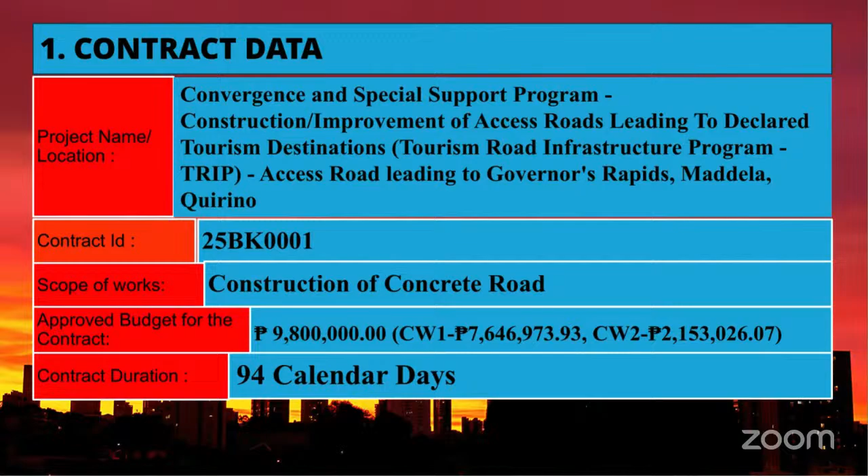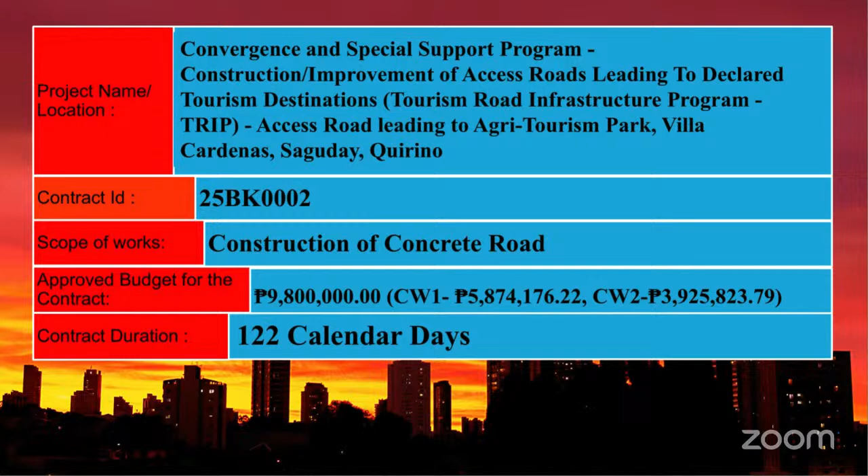For the second project: Convergence and Special Support Program, construction improvement of access roads leading to declared tourism destinations, access road leading to Agri-Tourism Park, Villa Cardenas, Saguday, Quirino. Contract ID 25BK0002. Scope of works: construction of concrete road. Approved budget for the contract: 9.8 million pesos. Contract duration: 122 calendar days.

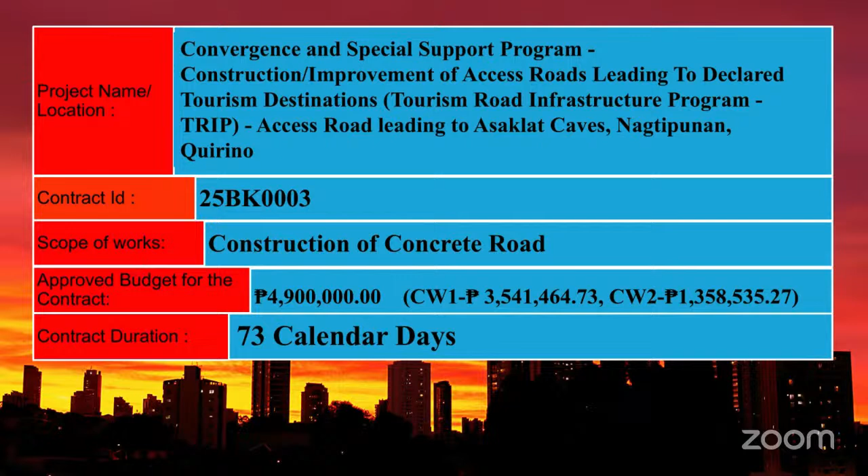For the third project: Convergence and Special Support Program, construction improvement of access roads leading to declared tourism destinations, access roads leading to Asaklat Caves, Nagtipunan, Quirino, with Contract ID 25BK0003. Scope of works: construction of concrete road. Approved budget for the contract: 4.9 million pesos. Contract duration: 73 calendar days.

For the eligibility requirements of the projects, for the Class A documents under legal: a Certificate of PhilGEPS registration must be a Platinum membership per GPPB Resolution Number 15, Series of 2021. Note that based on Section 8.5.2 of the revised IRR of RA 9184, all bidders shall upload and maintain in PhilGEPS their current and updated file of Class A eligibility documents under Sections 23.1(a) and 24.1(a) of the same IRR.

For the purpose of updating the Certificate of Registration and Membership, all Class A eligibility documents mentioned in the section supporting the veracity, authenticity, and validity of the certificate shall remain current and updated. Failure by prospective bidders to update their certificate with current and updated Class A eligibility documents shall result in the automatic suspension of the validity of its certificate until such time that all expired Class A eligibility documents have been updated.

Special PCAB license in case of JV with size range of at least Small B for roads and bridges, and license category of at least C and D for general engineering.

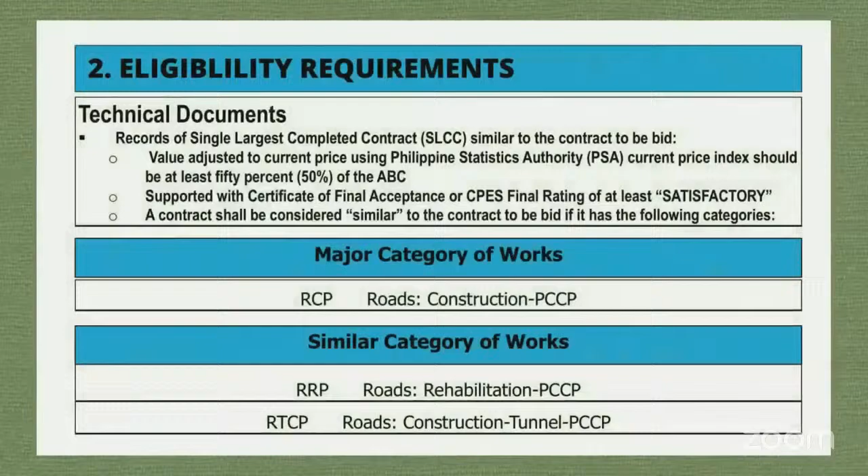Also required: a record of all its ongoing government and private contracts, including awarded but not yet started, if any, whether similar or not similar in nature and complexity to the contract to be bid. Also, records of the single largest completed contract, or SLCC, similar to the contract to be bid. The value, adjusted to current price using the PSA current price index, should be at least 50% of the ABC. It must also be supported with the Certificate of Final Acceptance or CPES final rating of at least satisfactory.

A contract shall be considered similar to the contract to be bid if it falls under the following categories: for the major category of works, RCP - Roads Construction PCCP; for the similar category of works, RRP - Roads Rehabilitation PCCP, and RTCP - Roads Construction Tunnel PCCP.

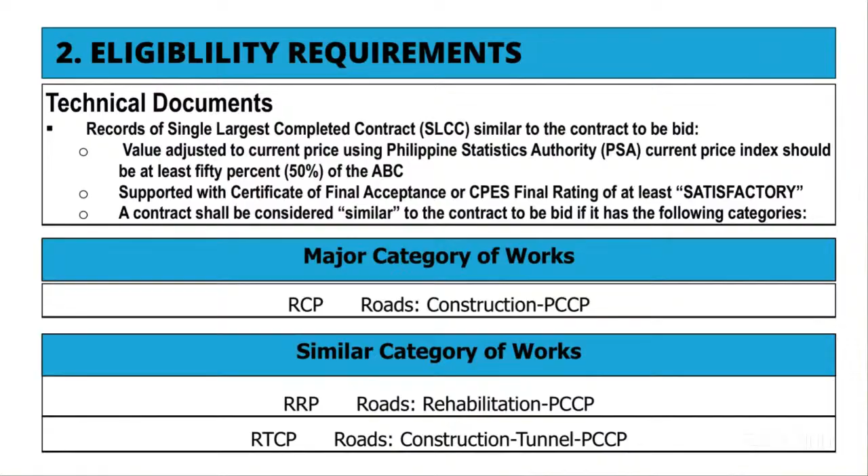For the financial documents, the computation of NFCC must be at least equal to the ABC, computed using the prescribed formula. NFCC equals current assets minus current liabilities, multiplied by a factor K of 15, less the value of unfinished projects, including awarded projects not yet started, coinciding with the contract to be bid.

For the Class B documents, for JV: a valid joint venture agreement. Each partner of the joint venture shall submit their respective PhilGEPS certificate of registration in accordance with Section 8.5.2 of the IRR of RA 9184. The submission of technical and financial eligibility documents by any of the joint venture partners constitutes compliance, provided that the partner responsible for submitting the NFCC shall likewise submit the statement of all its ongoing contracts and audited financial statements.

Regarding the submission and receipt of bids: bid submission may be done manually or electronically. However, bidders should only select one mode of submission, either manual or electronic.

Similar to manual submission, the guidelines for the preparation and submission of an electronic bid are contained in the bidding documents, ITB Clause 17, and Department Order Number 87, Series of 2020. All electronic bids must be sent to the email address electronicbids_Quirino@dpwh.gov.ph.

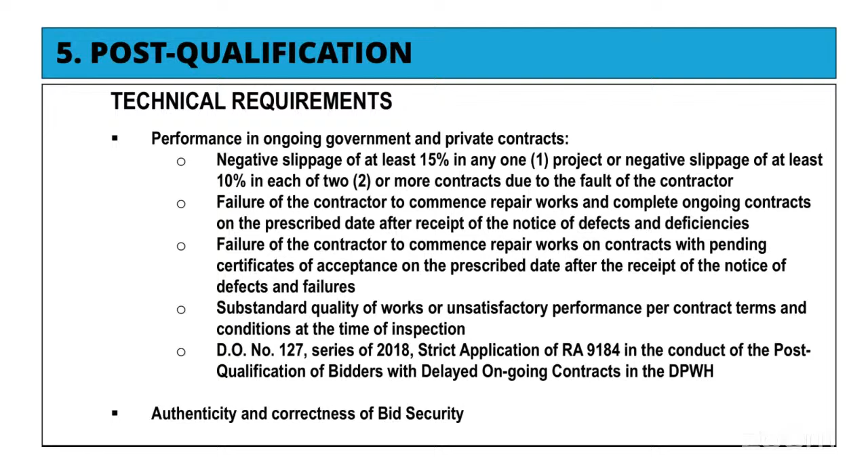DO Number 127, Series of 2018, governs strict application of RA 9184 in the conduct of post-qualification of bidders with delayed ongoing contracts in the DPWH. Another consideration is the conduct of authenticity and correctness of the bid security.

There are notes on key personnel and equipment requirements per DO9, Series of 2012, technical requirements for civil works projects for public bidding. If a proposed key technical personnel is an employee of the bidder and working on another project at the same time of the bidding, the bidder shall submit a certification that the personnel will be pulled out from the ongoing project once the bidder is awarded the contract, and will be replaced with another person with equal or better qualifications as certified by the head of the implementing office.

The bidder may propose a key technical personnel who is not an employee, provided that the said personnel submit a certification that they will work for the bidder if awarded the contract under bidding. This certification shall be included in the first envelope of the sealed bid.

Also to be verified during post-qualification is the set of equipment pledged by the bidder. The bidder should specify in the submitted bid the location of the equipment where it can be inspected. If any equipment is not in the specified location, the bidder shall be post-disqualified.

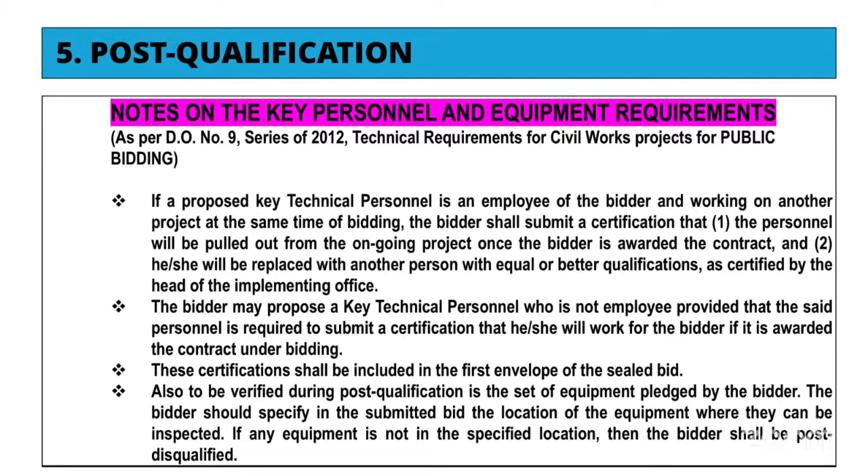For the requirements of these three projects: for the project manager, general experience of 3 years and relevant experience of at least 3 years. For the project engineer, minimum experience of 3 years. For the materials engineer, DPWH accredited ME1. For the safety officer, with COSH training certificate. For the foreman, 3 years of experience.

Note that the general experience of the key technical personnel is the total work experience regardless of the nature and position of the personnel, while the relevant experience is experience similar to the nature of work of the contract under bidding and of the same position, except for the materials engineer requiring only a DPWH accredited materials engineer 1.

In addition, kindly note DO Number 111, Series of 2018, with subject amendment to DO Number 79, Series of 2018, the revised limits of assignment of accredited DPWH materials engineers. For the list of key equipment units, please refer to the uploaded bidding documents.

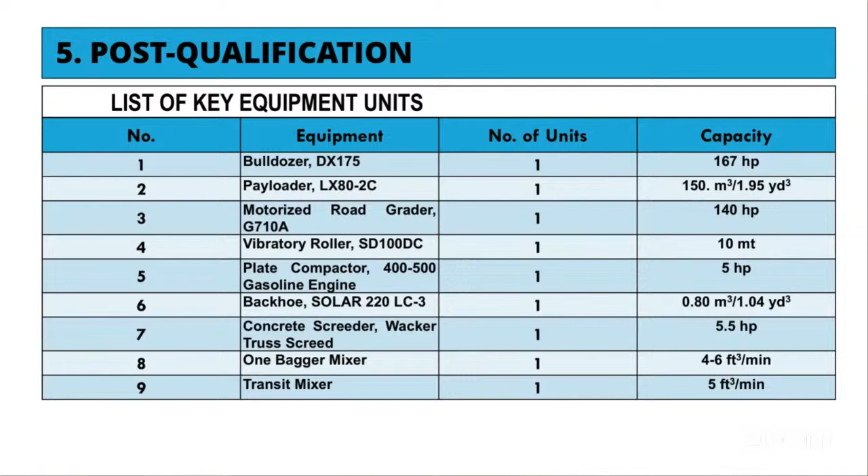The award of the contract shall be given to the bidder whose bid has been determined to be the lowest calculated and responsive bid as a result of the detailed evaluation and post-qualification conducted. Contract award shall be made within the bid validity period.

There are some reminders under Section 65 of RA 9184, Offenses and Penalties, Section 65.3. Private individuals who commit any of the following acts, and any public officer conspiring with them, shall upon conviction suffer the penalty of imprisonment of not less than 6 years and 1 day but not more than 15 years.

Submitting eligibility requirements of whatever kind or nature that contain false information or falsified documents calculated to influence the outcome of the eligibility screening process, or conceal such information in the eligibility requirements when the information will lead to a declaration of ineligibility from participating in competitive bidding.

Also, submitting bidding documents of whatever kind or nature that contain false information and falsified documents, or conceal such information in the bidding documents in order to influence the outcome of the competitive bidding.

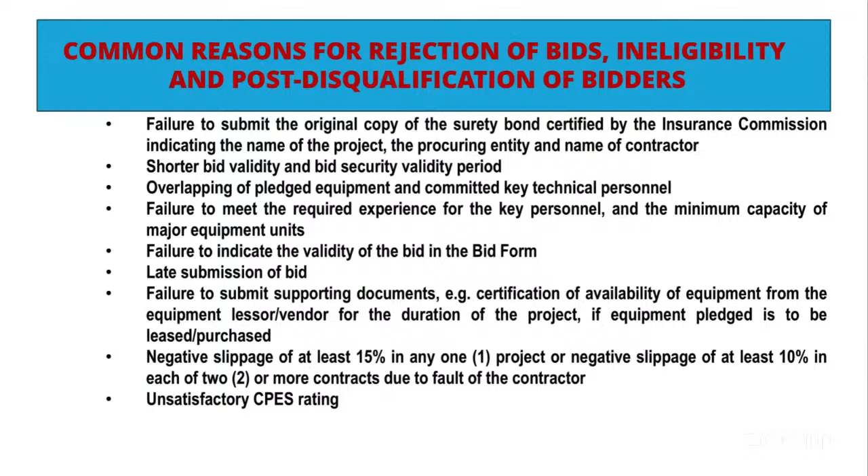Also, negative slippage of at least 15% in any one project, or negative slippage of at least 10% in each of two or more contracts due to the fault of the contractor, and unsatisfactory CPES rating. Another is incomplete pages of bid.

Another is the authority of the signatory to sign on behalf of the bidder. For single proprietor, the signatory should be the owner or proprietor only. For corporation or cooperative, board secretary certificate and board resolution. For the JV or joint venture, a joint venture resolution or agreement is enough. And for partnership, as indicated in the articles of partnership.

Deadline for the submission of these three projects is on October 21, 2024, not later than 10 a.m. For the number of bid proposals to be submitted: one original and 2 copies of the first and second component of the bid.

For the place of submission of bids, for manual submission: Procurement Unit, DPWH Quirino District Engineering Office, Cabarroguis, Quirino. For electronic submission: electronicbids_quirino@dpwh.gov.ph. For further information, please refer to Brenda B. Carbonell, Procurement Engineer, with email address carbonell.brenda@dpwh.gov.ph. Thank you.

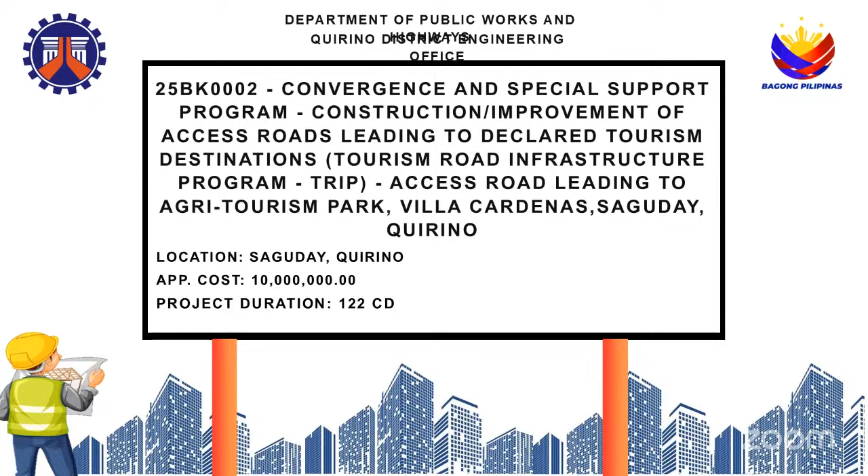For the next project, also a tourism project: access road leading to Agri-Tourism Park, Villa Cardenas, Saguday, Quirino, with an appropriation cost of 10 million and a project duration of 122 calendar days.

For the major category of work, also roads construction PCCP, with an ABC of 9,800,000, with two civil works. Civil works 1, construction of concrete road with an ABC of 5,874,176.22. And for civil works 2, construction of slope protection structure with an ABC of 3,925,823.79.

It includes also for Part B, other general requirements: project billboard, signboard, occupational safety and health program, traffic management, mobilization. Part C, earthworks: individual removal of trees, surplus common excavation, embankment from roadway, structural excavation, subgrade preparation, common material, structural excavation, common soil, foundation fill.

For Part D, sub-base and base course: aggregate sub-base course, surface courses, Portland cement concrete pavement unreinforced, 0.15 meters thick at 14 days for the shoulder and 0.28 meters thick at 14 days for the carriageway.

For Part F, bridge construction: reinforcing steel grade 40, structural concrete 20.68 MPa, class A at 28 days for the reinforced concrete retaining wall. Drainage and slope protection structures: pipe culverts of 610 diameter, class 4 RCPC. Part H, miscellaneous structure: curb and gutter precast, seedling sapling for other program initiatives, reflectorized thermoplastic pavement marking white.

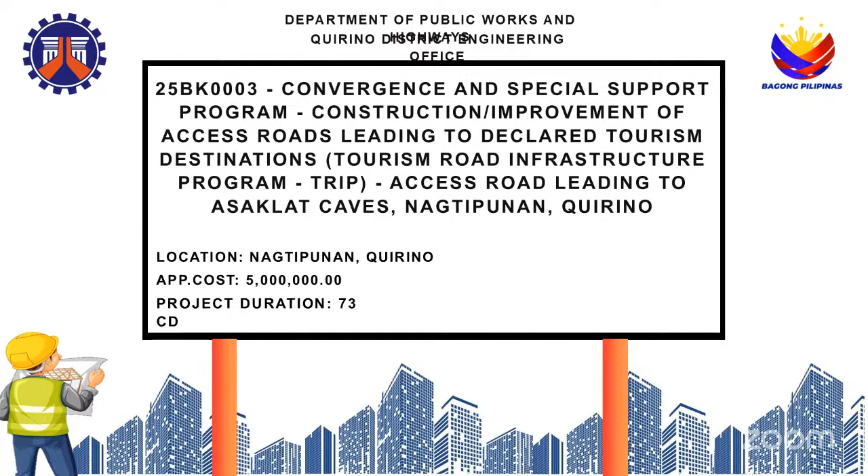For our third project, also a DOT project, Tourism Road: access road leading to Asaklat Caves, with an appropriation cost of 5 million, project duration of 73 calendar days, with a major category of work of road construction PCCP with an ABC of 4,900,000. For CW1, construction of concrete road, 3,541,464.73.

And for CW2, construction of slope protection structure, 1,358,535.27. It includes Part B, other general requirements: project billboard, signboard, occupational safety and health program, traffic management, mobilization, demobilization.

Part C, earthworks: removal of actual structure obstruction, 0.20 meters thick PCCP unreinforced, surplus common excavation, surplus rock excavation hard, structure excavation common soil, foundation fill, pipe culverts and drain excavation common soil, embankment from roadway, structure excavation common soil, subgrade preparation common material.

Part D, sub-base and base course: aggregate sub-base course. Part D, surface courses: Portland cement concrete pavement, unreinforced, 0.15 meters thick at 14 days, and 0.28 meters thick at 14 days. For the bridge construction, Part F: reinforcing steel grade 40, structural concrete 20.68 MPa, class A at 28 days.

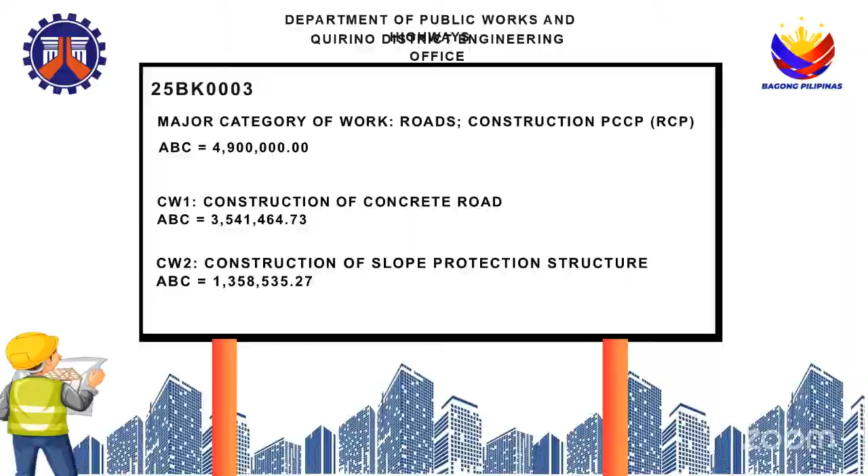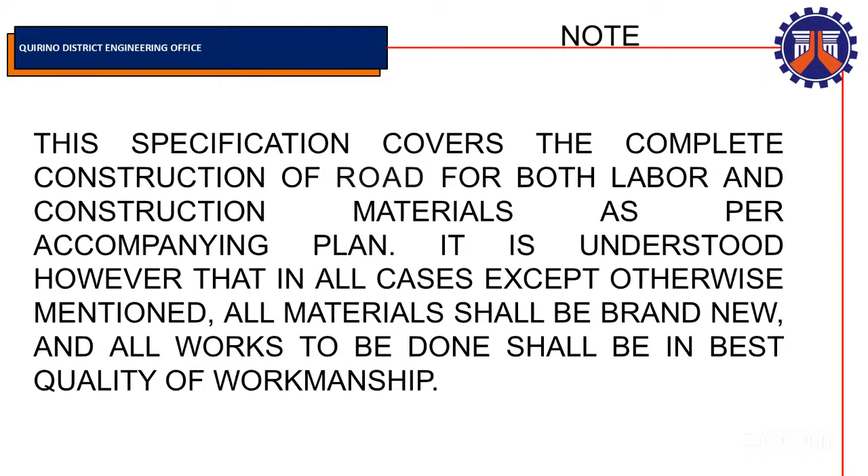For the specification of materials, this specification covers the complete construction of the road for both labor and construction materials as per accompanying plan. It is understood, however, that in all cases except otherwise mentioned, all materials shall be brand new and all works to be done shall be in the best quality.

For item 200, we have here the grading requirements. For the sieve designation, for 50 mm or 2 inches, 100% passing; 25 mm or 1 inch, 55 to 85% passing; and 9.5 mm or 3/8 inch, 40 to 75% passing, and 0.075 mm or number 200, 0 to 12%.

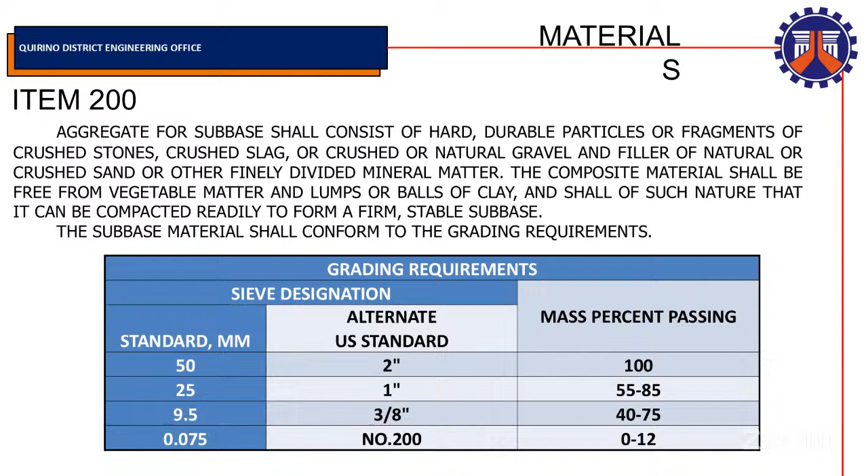For item 311, Portland cement concrete pavement, it shall conform to the applicable requirements of item 700, hydraulic cement. Only type 1 Portland cement shall be used unless otherwise provided for in the special provisions. Different brands, or the same brands from different mills, shall not be mixed, nor shall they be used alternately unless the mix is approved by the engineer.

However, the use of Portland pozzolan cement type 1P, meeting the requirements of AASHTO M240 or ASTM C595, the specification for blended hydraulic cement, shall be allowed, provided the trial mixage shall be done and that the mixage meets the concrete strength requirements. The AASHTO/ASTM provisions pertinent to the use of Portland pozzolan type 1P shall be adopted. Cement which for any reason has become partially set or which contains lumps of caked cement will be rejected. Cement salvaged from discarded or used bags shall not be used.

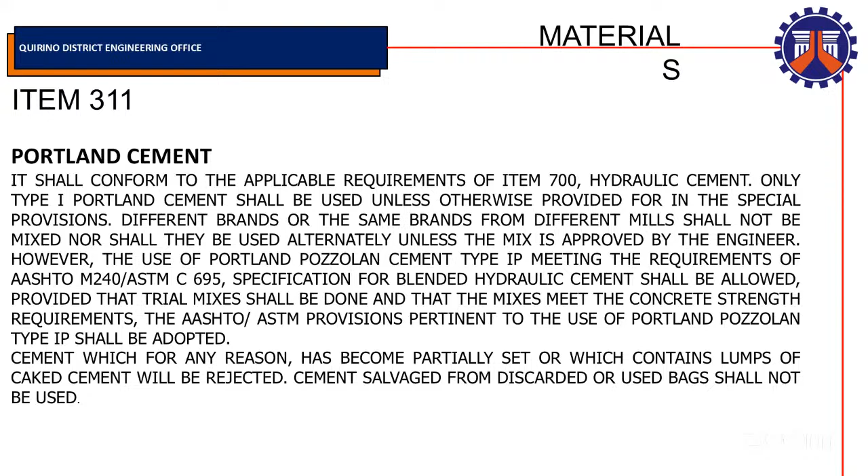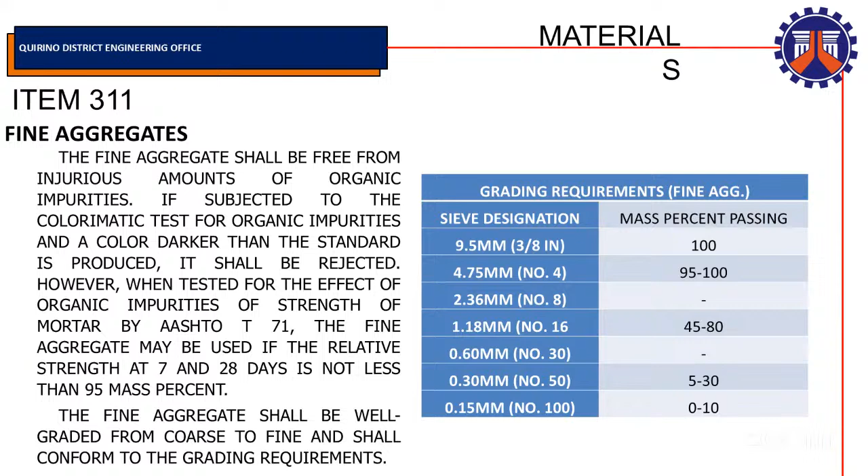For fine aggregates, it shall also conform with the grading requirements for sieve analysis: sieve designation 9.5 mm (3/8 inch), 100% passing; 4.75 mm (number 4), 95 to 100% passing; 1.18 mm (number 16), 45 to 80% passing; 0.3 mm (number 50), 5 to 30% passing; and 0.15 mm (number 100), 0 to 10%.

For coarse aggregate, it also shall conform to the grading requirements for coarse aggregate. We have three gradings: grading A, grading B, and grading C.

For grading A: 3 inches, 100% passing; 2 and 1/2 inch, 90 to 100% passing; 1 and 1/2 inch, 25 to 60%; 3/4 inch, 0 to 10%; 1/2 inch, 0 to 5%.

For grading B: 2 and 1/2 inch, 100% passing; 2 inch, 90 to 100% passing; 1 and 1/2 inch, 35 to 70%; 1 inch, 0 to 15%; and 1/2 inch, 0 to 5%.

For grading C: 2 and 1/2 inch, 100% passing; 2 inch, 95 to 100%; 1 inch, 35 to 70%; 1/2 inch, 10 to 30%; and number 4, 0 to 5%.

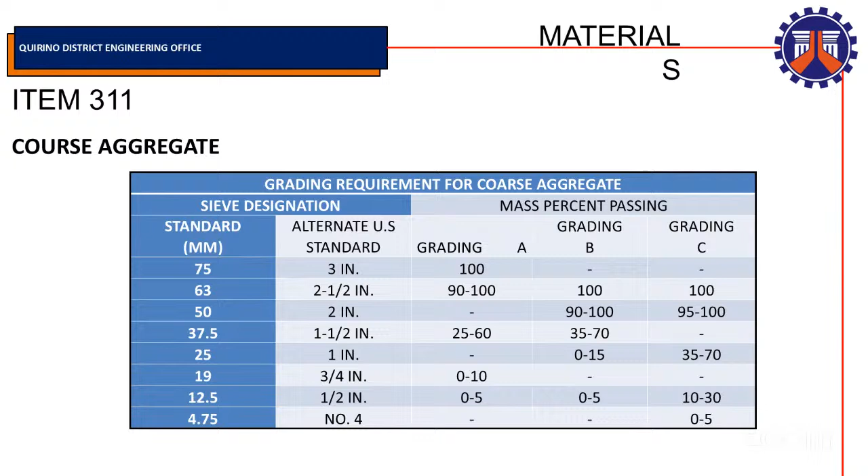For item 404, reinforcing steel, the reinforcing steel shall meet the requirements of item 710, reinforcing steel and wire ropes. Before materials are ordered, all order lists and bending diagrams shall be furnished by the contractor for approval of the engineer. The approval of the order list and bending diagram by the engineer shall in no way relieve the contractor of responsibility for the correctness of such lists and diagrams. Any expense incident to revision of material furnished in accordance with such list and diagram to make them comply with the plan shall be borne by the contractor.

Steel reinforcement shall be stored above the surface of the ground upon platforms, skids, or other supports and shall be protected as far as practicable from mechanical injury and surface deterioration caused by exposure to conditions producing rust. When placed in the work, reinforcement shall be free from dirt, detrimental rust, loose scale, paints, grease, oil, or other foreign material.

Reinforcement shall be free from injurious defects such as cracks and laminations. Rust, surface seams, surface irregularities, or mill scale will not be cause for rejection, provided the minimum dimensions, cross-section area, and tensile properties of a hand-wire brush specimen meet the physical requirements for the size and grade of steel specified.

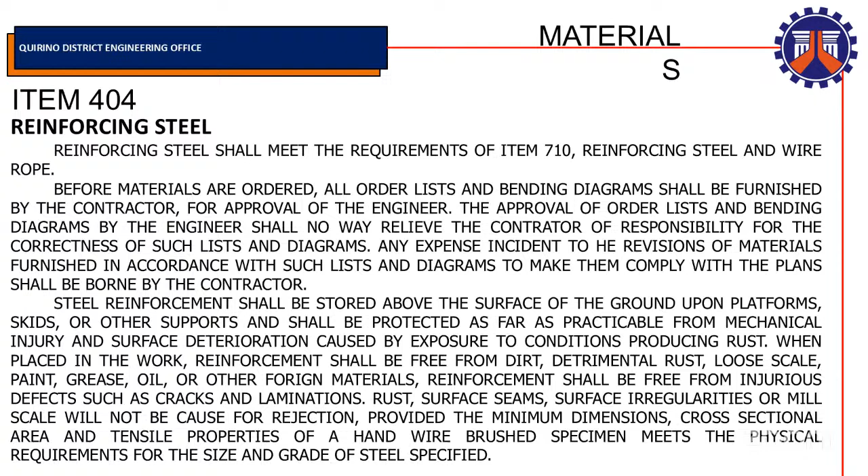For reinforcing bars requiring bending, bars shall be bent to the shape shown on the plans or as required by the engineer. Bars shall be bent around a circular pin having the following diameter in relation to the nominal diameter of the bar: for 10 to 20 mm, pin diameter should be 6D; for 25 to 28 mm, 8D; for 32 mm and greater, pin diameter is 10D.

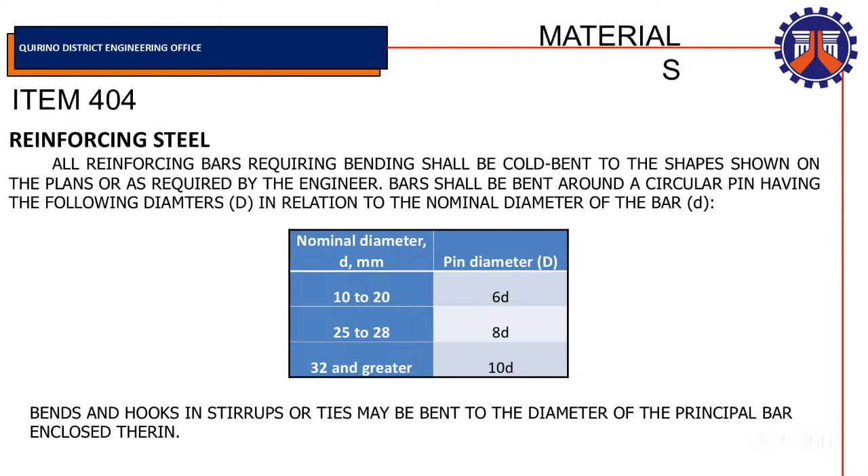For splices in tension, grade 40 requires 24 bar diameters, grade 60 requires 36 bar diameters, but not less than 300 mm. For compression bars, grade 40 requires 20 bar diameters, grade 60 requires 24 bar diameters, but not less than 300 mm.

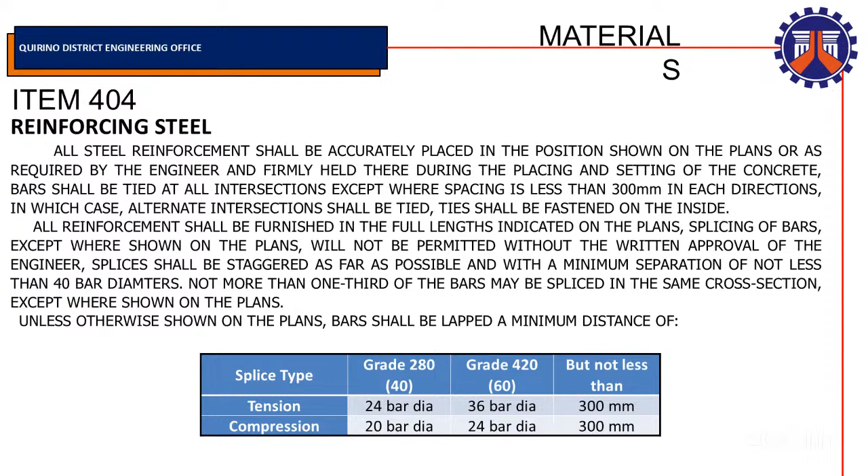For item 405, structural concrete, it shall also conform to the grading requirements of coarse aggregate for class A. For standard 50 mm (2 inch), 100% passing; 37.5 mm (1.5 inch), 95 to 100%; 19 mm (3/4 inch), 35 to 70%; 9.5 mm (3/8 inch), 10 to 30% passing; and 4.75 mm (number 4), 0 to 5%.

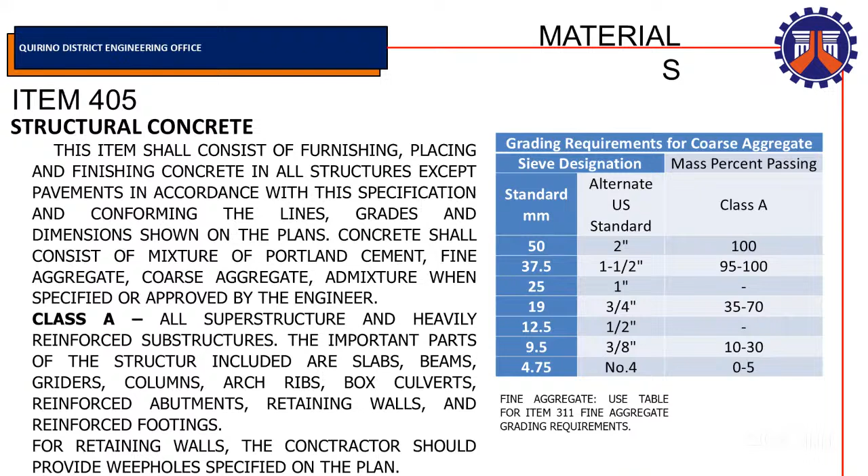For item 603, guardrail, this item shall consist of furnishing and constructing posts and guardrails of the type called for in the contract and in accordance with this specification, at the location and in conformity with the lines and grade shown on the plans or as required by the engineer.

Material for the desired type of guardrail shall meet the requirement specified in AASHTO M180, metal beam rail. Splices and end connections shall be of type and design specified or as shown on the plans and shall be of such strength as to develop the full design strength of the rail element. Unless otherwise specified, all fittings, bolts, washers, and other accessories shall be galvanized in accordance with the requirements of AASHTO M111 or ASTM A153, whichever may apply.

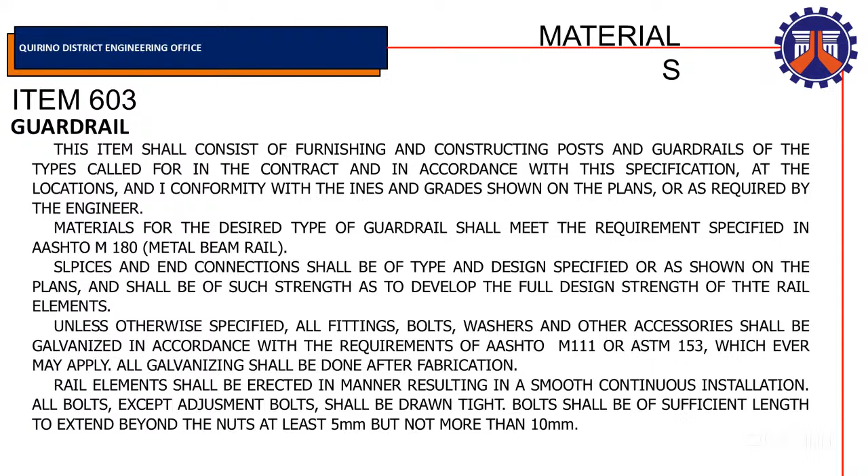All galvanizing shall be done after fabrication. Rail elements shall be erected in a manner resulting in a smooth, continuous installation. All bolts except adjustment bolts shall be drawn tight. Bolts shall be of sufficient length to extend beyond the nuts at least 5 mm but not more than 10 mm.

For item B5, project billboards, the materials include 4 feet by 8 feet tarpaulin for the DPWH tarpaulin, and 8 by 8 tarpaulin for the COA tarpaulin, coco lumber, assorted common wire nails, and 5 mm marine plywood.

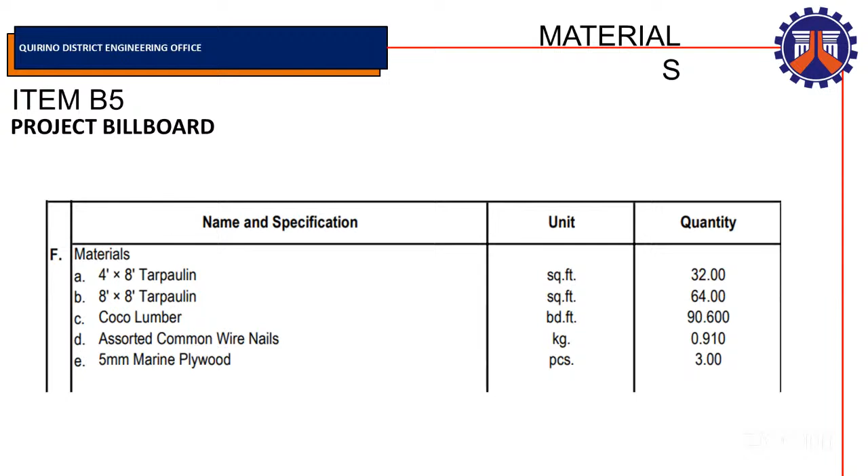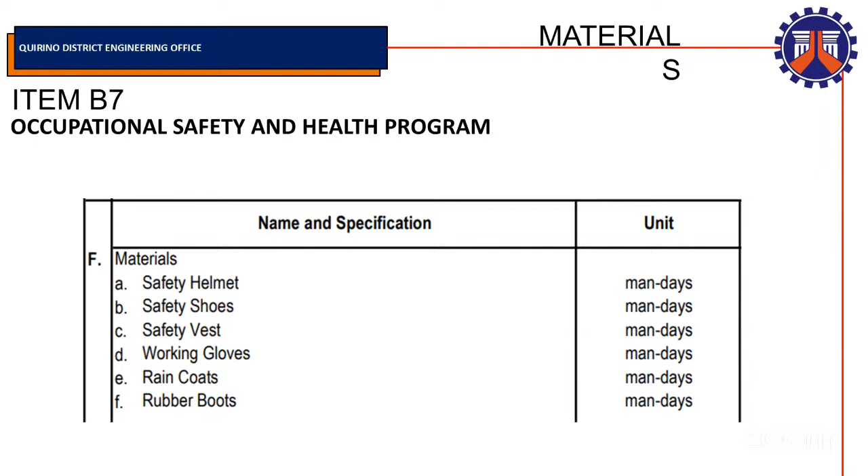For item B7, occupational safety and health program, the materials include safety helmets, safety shoes, safety vests, working gloves, raincoats, and rain boots/rubber boots.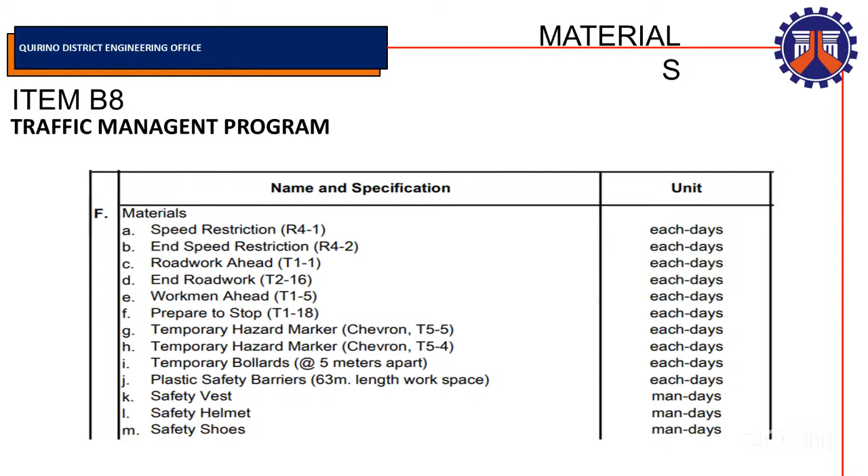For item B8, traffic management program, materials include speed restriction signs, road work ahead signs, workmen ahead signs, prepare to stop signs, temporary hazard markers, chevrons, temporary bollards, plastic safety barriers, safety vest, safety helmet, and safety shoes.

For the layout of the traffic management, all materials for the traffic signs shall be retro-reflective.

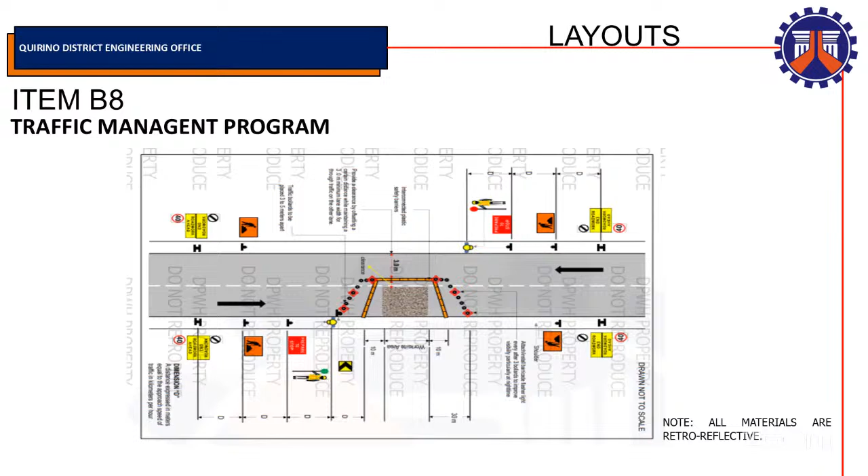For item B8 also, we have new signs for road work ahead. A triangular road work sign is introduced; it's no longer the rectangular sign. For the handheld sign of the flagman, it's circular for stop and the back is for slow. For the rectangular flags, this should be used for emergency traffic, but for normal traffic it should be the circular stop and the slow yellow sign.